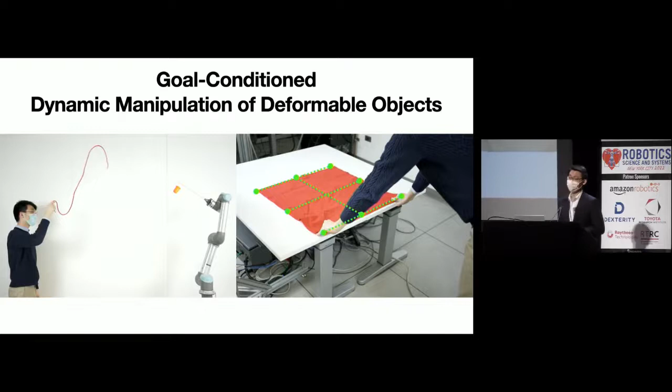We are interested in the task of goal-conditioned dynamic manipulation of deformable objects. For example, hitting a target accurately with an unknown rope, or placing a tablecloth to a precise location. To the best of our knowledge, no existing robotic systems can solve this task.

Why is it so hard? Well, under dynamic actions, we can no longer ignore the object's physics during planning. Yet the physics of deformable objects are notoriously difficult to model. And even if we have a perfect model, we all know how hard it is to tune the simulation parameters for even just one object.

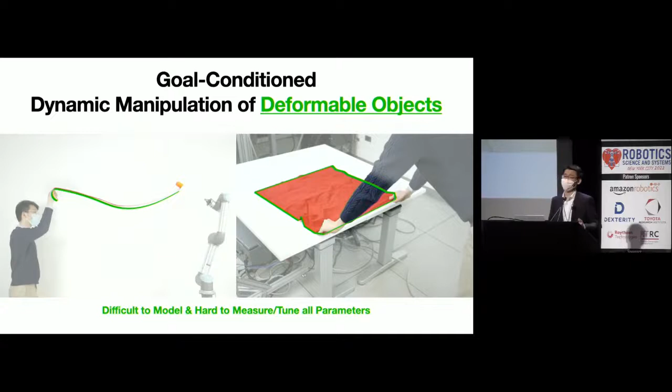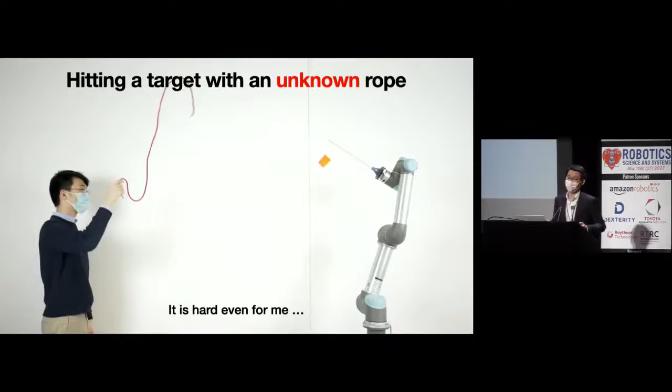And to make things worse, our tasks require high precision to achieve the goal, with a tolerance of a few centimeters. And to be honest, the whipping task in particular was quite hard even for me. Given an unknown rope, it's close to impossible for me to hit the goal on my first attempt. But the good thing is that after each attempt, I can get closer and closer and eventually hit the goal.

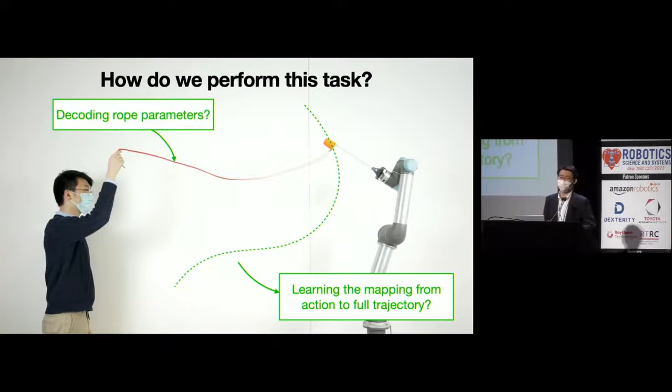So what did I learn during this process? Was I able to learn the mapping from action to a full trajectory? I don't think I can. Was I decoding some key rope parameters, like the length or density? I don't think I can either. Did I bump into the goal via some random exploration? Unlikely, given the size of the action space and the tight tolerance required. However, these are the popular methods that we use today to solve similar problems.

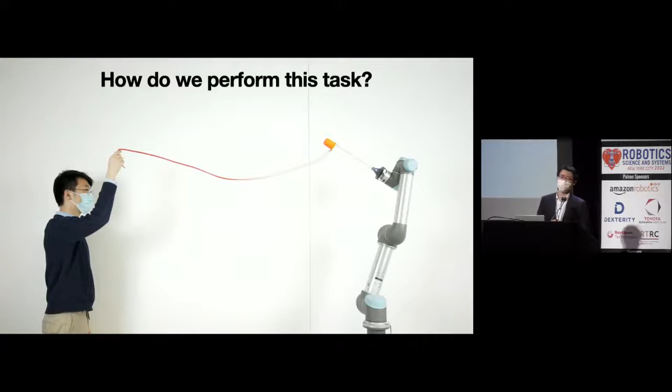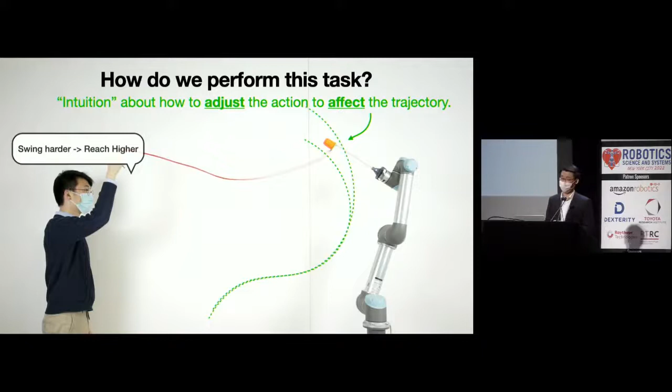So if that's not what we learned, then what is it? I think I have this intuition about how adjusting the action will affect the trajectory. For example, swinging harder will make the rope reach higher, and extending my arm will make the tip go further. It's hard to know how exactly the trajectory will change based on my action, but my guess for which direction to change my action is almost always correct.

And therefore, our hypothesis is the knowledge about this change or adjustment is much easier to learn and generalizable to different objects. And therefore, in this work, we formalize this intuition into an algorithm called Iterative Residual Policy. And here's how it works.

At its core, the algorithm learns a delta dynamics model that takes in the observed trajectory and a delta action as input, and predicts the updated trajectory with the delta action applied. Here, we parameterize the action with two target joint angles and a maximum joint speed. The trajectory is represented as the occupancy grid.

By sampling different delta actions and predicting the corresponding trajectory, our algorithm is able to iteratively select a better action and get closer and closer to the goal. Note that this delta dynamics model is trained entirely in simulation.

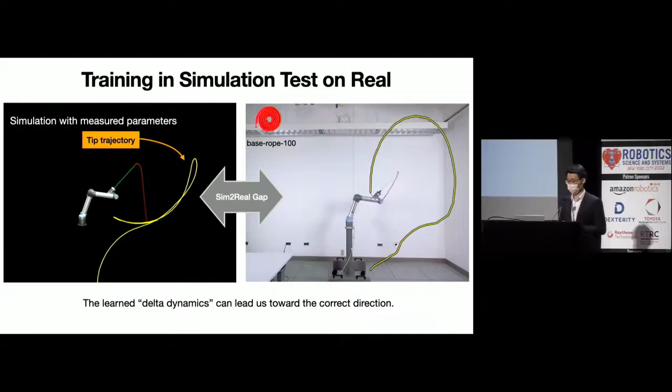And here is the system in action. We track the tip of the rope with a camera and use the trajectory as input. The error is defined by the shortest distance along the trajectory to the goal.

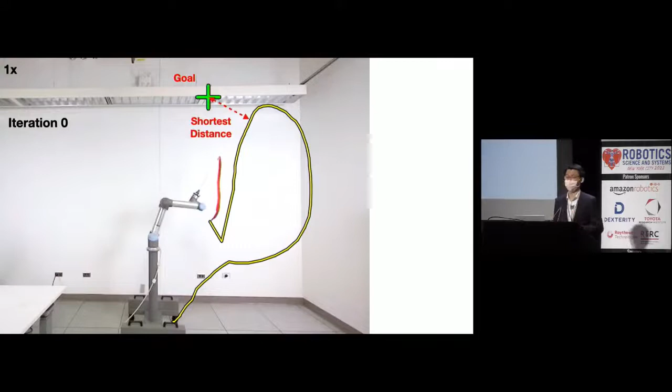And then the algorithm will sample a set of delta actions from a Gaussian distribution, and the width of this Gaussian distribution is scaled proportionally with the error. And then we predict the trajectory for each delta action, and the delta action associated with the smallest error is selected for next step execution. This process will repeat until convergence, and it usually takes less than 10 steps for this task.

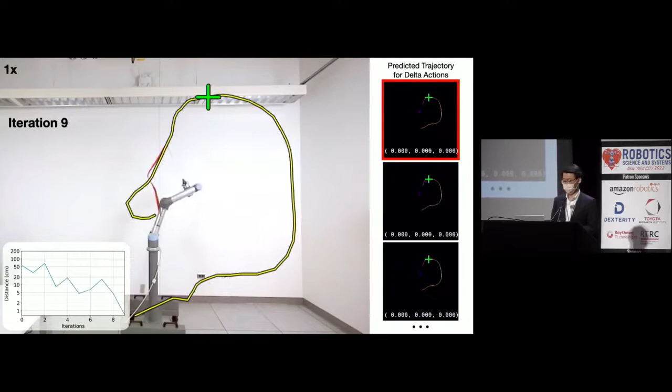All right, that's for one rope. And in the following experiments, we want to systematically test our algorithm's generalization capability against different ropes with significantly different physical parameters. In all following experiments, we use exactly the same model trained in simulation only.

And here, I want to show you how big the difference is between different real-world ropes. What you see here are the tip trajectories of different ropes executed using exactly the same robot action. As you can see, they're very different. The first one on the left is not even a rope, it's a long piece of cloth that has much higher air resistance compared to a rope.

The third one is a bullwhip, which is quite stiff and has non-uniform linear density. The effect of these properties are not captured at all in our training data, which was collected in simulation. Therefore, it really requires a system to adjust using visual feedback to accommodate these different novel rope dynamics.

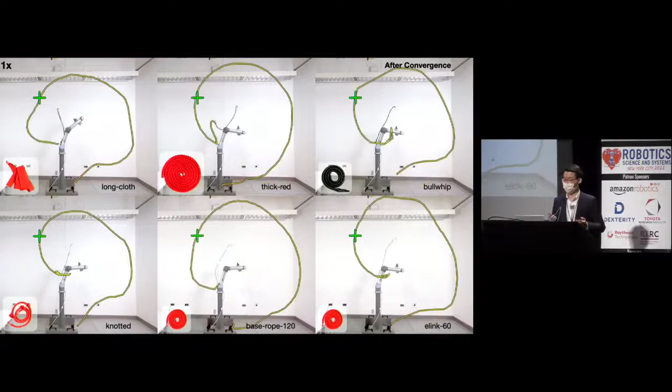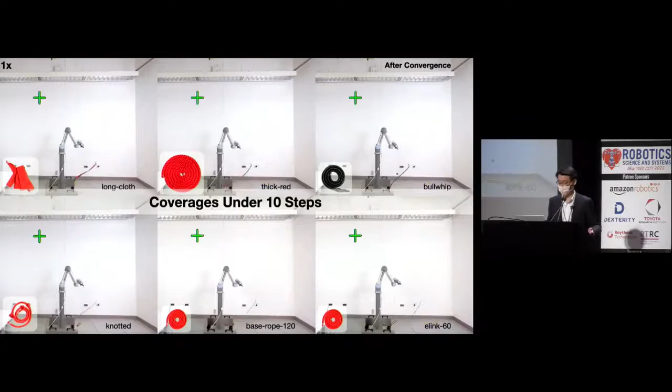Here is the resulting trajectory of the policy after it converges on each goal. As you can see, the policy will choose different actions to reach the same goal to accommodate different rope dynamics. The accuracy here is very close to the limit of our trajectory representation resolution. We also want to highlight our sample efficiency, since all of these results converge in less than 10 steps in real.

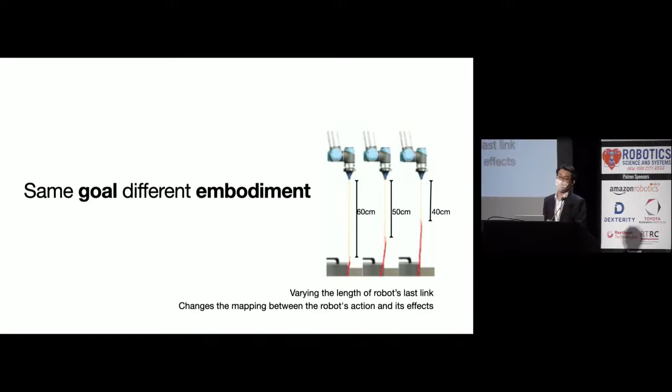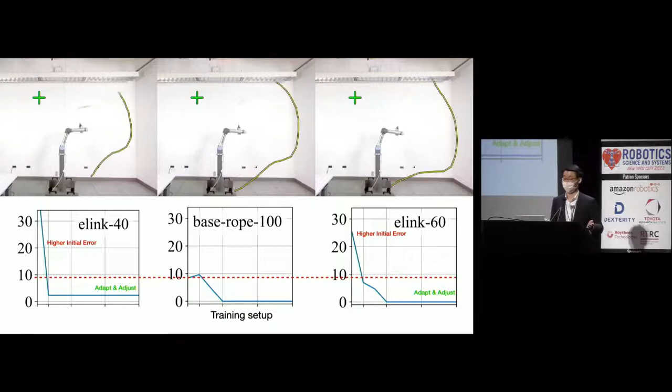Next, we want to show a less common form of generalization, which is against different robot hardware embodiments. We vary the length of the robot's last link, which changes the mapping between action parameters and their effect. Again, exactly the same model trained in simulation is used. As we can expect, robot systems with different hardware embodiments compared to the training setup started out with a much higher error, but regardless, it's able to adjust using visual feedback and get good performance.

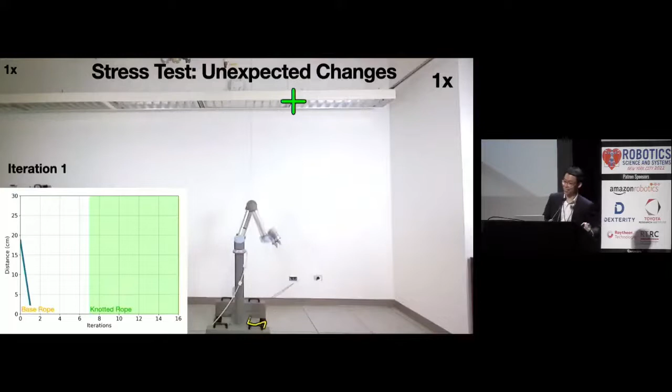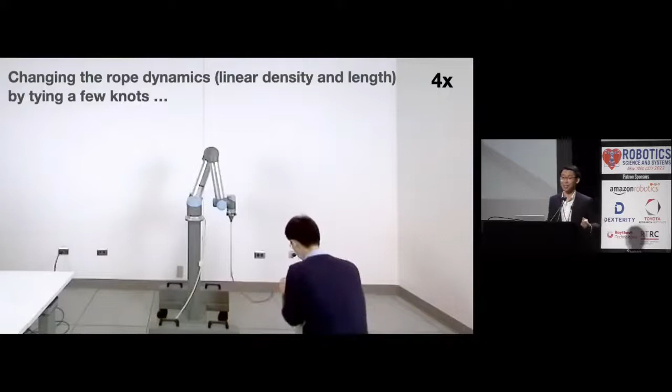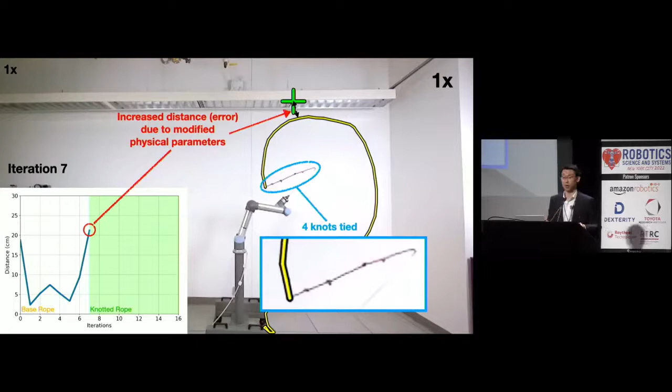Then we want to further stress test our system's robustness against unexpected changes. We first let the system converge on a given rope and goal. Then I come in and tie several knots on the rope, which changes linear density and length. As we can expect, it immediately results in much higher error, but regardless, the system can adjust using visual feedback and quickly regain good performance.

This actually happens to us multiple times organically during our experiment, because sometimes the rope just ties knots on itself. But regardless, the system still works, and then we only see a spike in loss.

Finally, we want to demonstrate the generality of the IRP framework by applying it on a slightly different task, which is cloth placement. The task is to place tablecloths at a precise location given a target pose, where the pose is defined by 9 key point locations on the cloth. Note that some of these target poses are outside the robot's physical reach range. Therefore, dynamic actions are required to solve this problem.

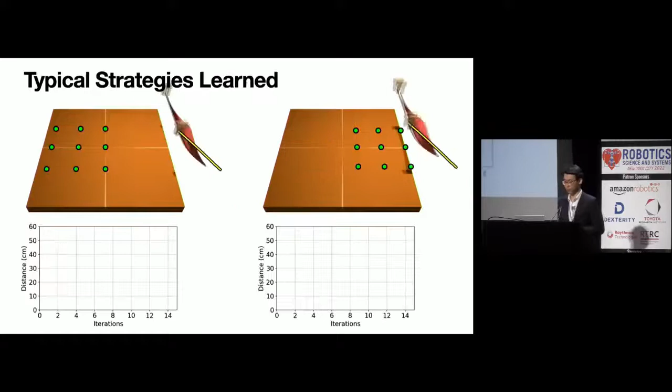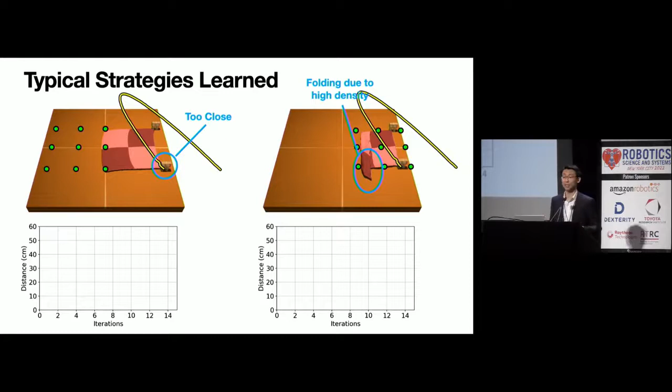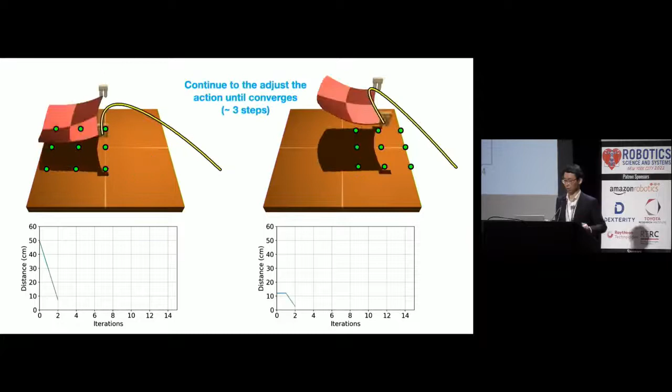Here are 2 typical strategies learned by our algorithm. In the first case, the cloth landed a bit too close compared to the goal. In the second case, the cloth folded by itself due to high density. Based on this observation, the algorithm will increase stroke to swing further in the first case, and decrease speed to prevent folding in the second case. Our algorithm will continue to adjust action until convergence, which usually takes 3 steps for this task.

OK, here's our takeaways. Even though we've only tested on 2 tasks, we believe the formulation of iterative residual policy is quite general and applicable to many tasks with complex dynamics, as long as, number 1, your state is resettable after a failed attempt, and number 2, your observations are trackable. For example, in our case, the goal and the tip location can be tracked as key points throughout the execution.

What we learned from this project is that for some cases, instead of learning the full dynamics model which maps from action to their effect, learning changes in action to changes in their trajectory is much easier to learn and generalizable to different objects, because the direction of this change is invariant against many physical parameters that we have tested.

We also want to say that IRP is a new way to distill relevant knowledge from existing simulators, especially when they're inaccurate. If we think about our existing simulators, a lot of them started out with gaming applications in mind, and therefore they trade accuracy for speed. But still, humans can transfer our real-world skills to these games just fine, which means the simulator must be doing something right. Our goal should be to figure out the right way to use these simulators to unleash their full potential in robotics.

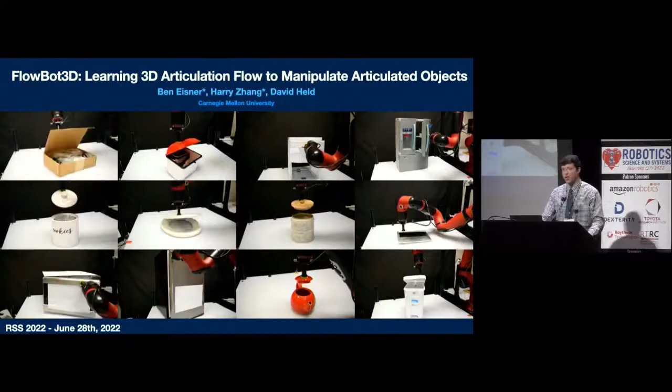Okay, so next up we have Benjamin Eisner presenting Flowbot 3D, learning 3D articulation flow to manipulate articulated objects. Hey everybody, my name is Ben, and I'm presenting some work on manipulating articulated objects conducted by me, Harry Zhang, and David Held at Carnegie Mellon.

Articulated objects are everywhere. We interact with them all the time. We open doors, drawers, laptops, staplers, refrigerators, all these things without even thinking about it. We can estimate how objects can move just by looking at them. Even though you may not have seen these specific objects before, you've likely seen similar objects, and therefore you can imagine how they might move and how you might use them. And in fact, you definitely can.

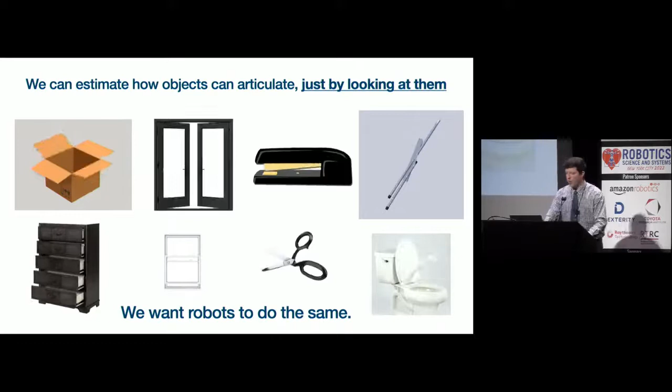We want robots to have the same estimation ability. So how might we construct a robot learning system to successfully manipulate articulated objects just from raw visual observations? Well, one common paradigm in robot learning is to learn a big end-to-end neural network model, which maps directly from raw observations to low-level robot actions. This style of approach can be quite powerful because it can directly optimize for the manipulation task at hand. However, it's often quite hard for these end-to-end models to generalize well outside of their training domain.

Now, at the other end of the spectrum, you can design a modular visual scene understanding pipeline tailored to the task of articulating objects. This might consist of a segmentation model which segments discrete objects in the scene and then further segments out each part of each object. Then you might want to determine which of those parts are connected to each other and build a kinematic tree connecting all the parts found in each object. For each articulation you find, you might want to estimate the exact screw parameters which govern the articulation. Once you've parsed this whole representation, you can pass it to a motion planner, which can grab the part you want to move and use the estimated structure of the object to devise a good path to articulate the part. When designed correctly, such modular approaches can generalize quite well, better than end-to-end approaches, particularly when it's difficult to collect many real-world trials.

Now, there are points of failure in the system, and there are many of them. Each of these estimation submodules is kind of an open area of research in itself, and an error in any one module can derail the execution of the system. So this can be quite brittle. We'd like an approach that gets the best of both worlds, allowing us to impose some domain knowledge into the system while having fewer points of failure.

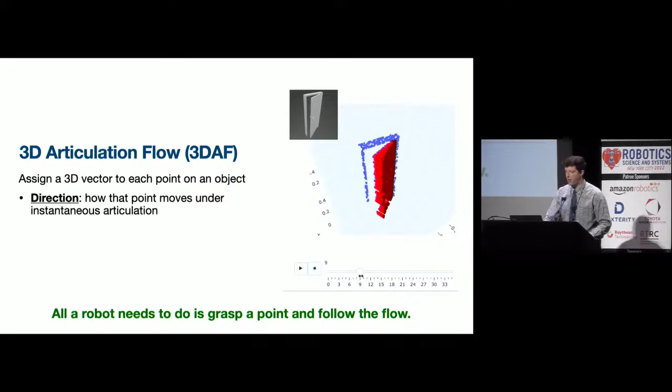We assign a 3D vector to every point on the object. The direction of this vector describes how that point can move under instantaneous articulation, and therefore which direction of optimal force is at that point. The magnitude of the vector describes the relative leverage at that point.

So all you need to do is look at this diagram here. You see these red vectors, which are the 3D articulation flow. The longer vectors occur further from the door hinge, and they all point in the direction that the door will move as it swings out. So given this representation, all the robot needs to do is grasp a high leverage point on the object and articulate the object in the direction that that flow points.

Okay, so how do we go about predicting 3D articulation flow? We take a point cloud observation, run it through a standard PointNet++ backbone, and output our estimate of 3D articulation flow. Specifically, for each point in the input we predict a flow vector, delta x, y, z, which indicates the amount that point would move if a small articulation were applied in the opening direction.

We can compare this predicted articulation flow directly to some ground truth articulation flow, computed from the known kinematic structure of the training objects in our dataset. We supervise this articulation flow with the mean squared error loss between the predictions and the ground truth.

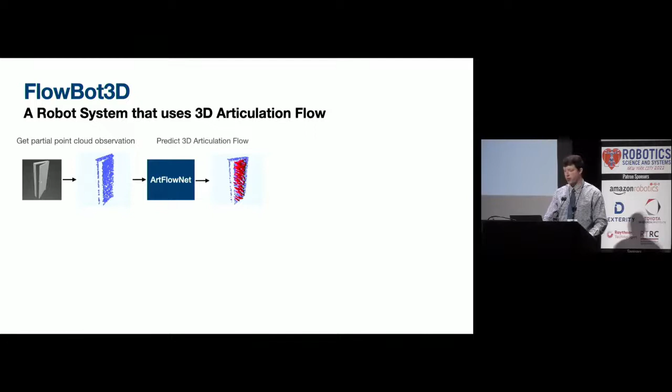Now we'll describe how we can use this 3D articulation flow in a real robot system, which we call Flowbot3D. First, we use a depth camera or LiDAR to get a partial point cloud observation of the object, then we use our 3D articulation flow estimation module to densely predict the 3D articulation flow at every point in the input. Then we execute a two-phase policy.

First, we select a contact point on the object, which amounts to choosing the point with the highest leverage subject to the constraint that the point is graspable. For a suction gripper, we only choose points with low estimated surface curvature, a simple heuristic that works pretty well. We then use a motion planner to send the robot to that grasp location and execute the grasp.

Once the robot has grasped the object, we can directly take the 3D articulation flow predicted at that contact point and set that as the desired direction to move the gripper. Then we use motion planning to move the gripper in that direction a small amount. Finally, we close the loop by taking another point cloud, getting the articulation flow, executing a small motion, and repeating until the object has been fully articulated.

So the only learned part of this system is that articulation flow estimation module. To train this, we select objects from the PartNet Mobility dataset and train a single model across examples from 11 different training categories. We use a simulator to get the ground truth articulation flow from these categories.

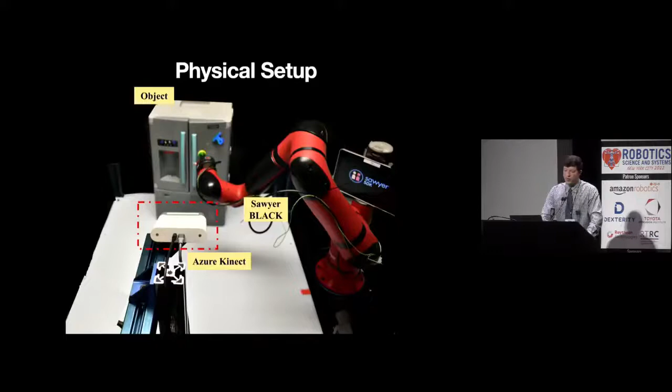We can then test on 10 unseen categories of objects, as well as a real-world collection of articulated objects that we've found in the real world. For our real-world physical setup, we use a robot arm with a suction gripper and the object in a workspace, with a fixed depth camera pointed at the scene.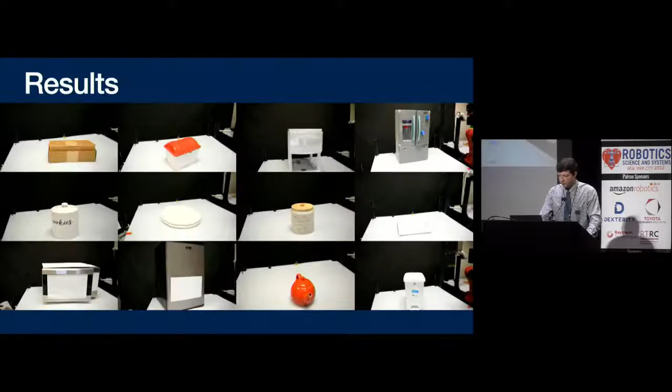Now we'll talk a little bit about how the system performs on both real and simulated tasks. You can see some example success cases here.

So, in essence, our system generalizes to both unseen objects and to real-world objects.

To give you a sense of what predicted articulation flow looks like, here are some examples. In both cases, the network learns to predict very consistent flow, and it predicts flow only on the parts of the object which can move. On the test object, when the points on the moving part become a little occluded, the prediction quality degrades a little bit, but the majority of frames and views give a reasonably accurate estimate.

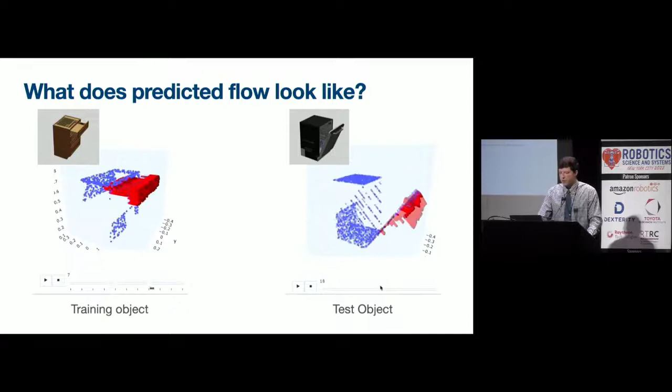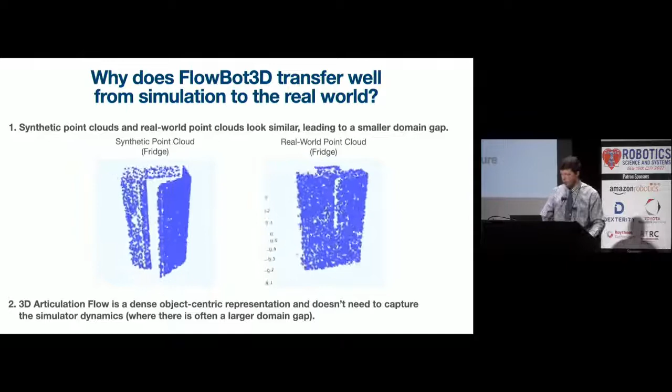So why does this system transfer well to the real world with a minimal drop in performance? We think that this is because of two reasons. First, the input data is a point cloud, which looks relatively similar between simulation and the real world. Second, we're really learning a dense object-centric representation, which is a function of the kinematic properties of the object, instead of learning dynamics or any other kind of property, which is notoriously difficult to transfer from sim to real.

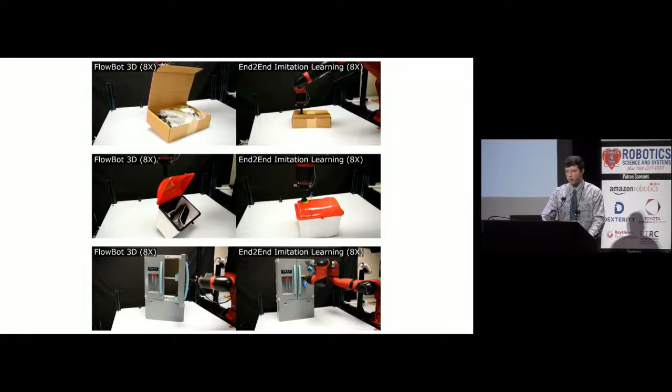All right, let's take a look at some real-world results. We compare our method with an end-to-end policy in the real world. As we can see, Flowbot 3D is able to repeatedly choose a good direction in which to open each object, while the end-to-end method is not consistently able to do so. Now, these jars aren't technically articulated, but we treat jar lids as if they were prismatic joints. This follows the convention from the Sapien dataset.

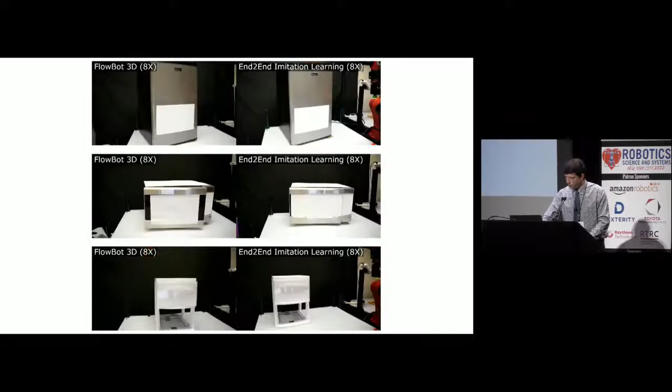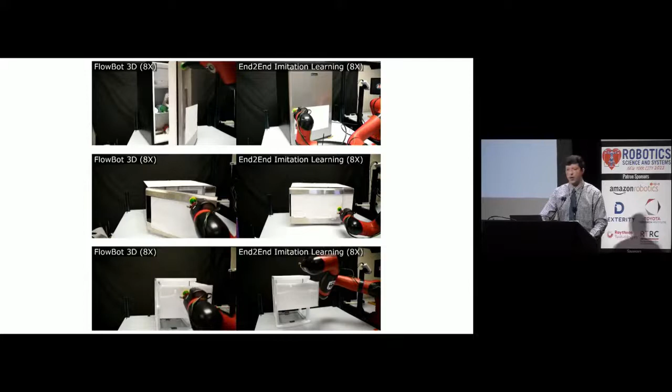Now, when the objects are very heavy or fixed to the table, Flowbot 3D still succeeds with a small amount of compliance in the gripper and controller, making the policy robust to small prediction errors. And here's my favorite example, which is lifting a toilet seat.

All right, to recap: Flowbot 3D estimates 3D articulation flow and uses motion planning to articulate novel objects. It significantly outperforms end-to-end policies while avoiding the brittleness of modular approaches. And best of all, we generalize to unseen objects and transfer to the real world without retraining.

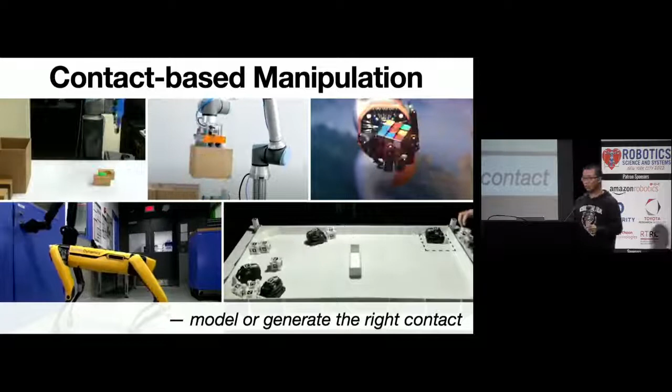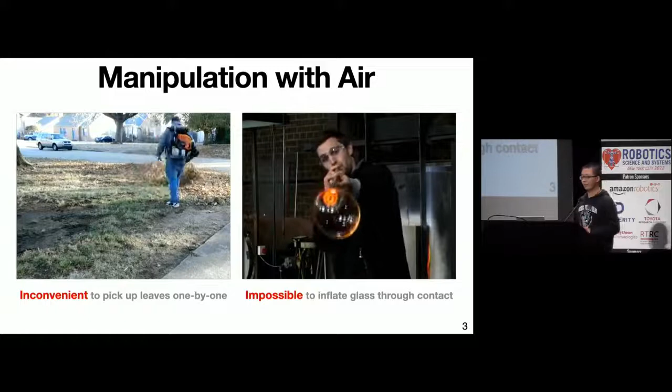When we talk about robot manipulation, it's often all about contact, such as how to model or generate the right contact in order to interact with an object. However, many common objects in our daily life are either inconvenient or even impossible to manipulate with contact. For example, it's inconvenient to pick up leaves one by one, and it's impossible to inflate glass with our hands. But they can be effectively manipulated using air.

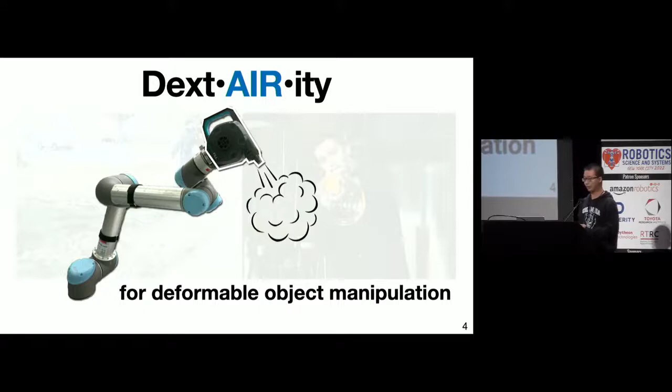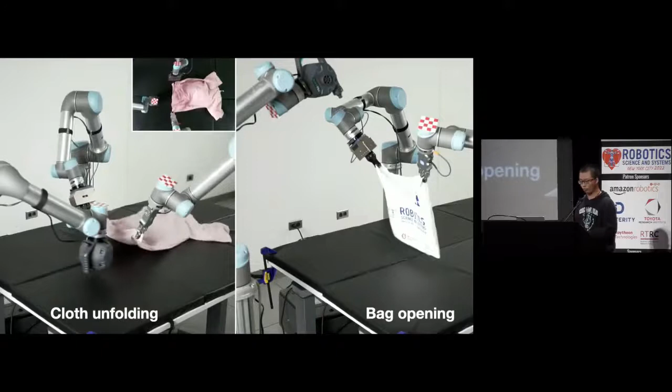So in this work, we want to enable robotic dexterity with air. So we call it DextAIRity, with an A-I-R inside the name. We study it in the context of deformable object manipulation, such as unfolding a crumpled cloth or opening a deformable bag. Both of them are very challenging for contact-based manipulation, but they can be nicely solved with DextAIRity.

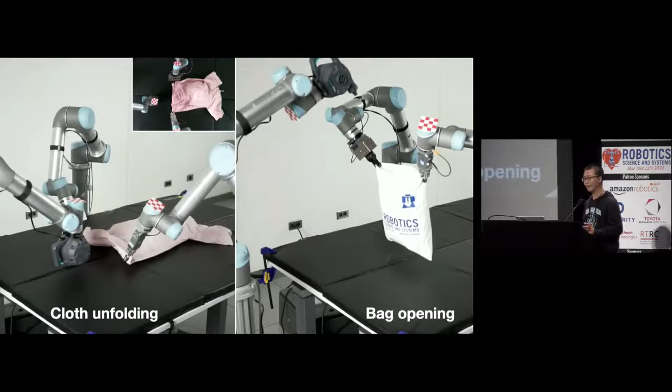So why do we want to use air for manipulation? Here are a few advantages. First, air enables the robot to apply a dense force field. For example, we can extinguish all these candles with only one blow. In contrast, contact-based manipulation can only apply force through sparse contact, which is often not efficient for underactuated objects like cloth.

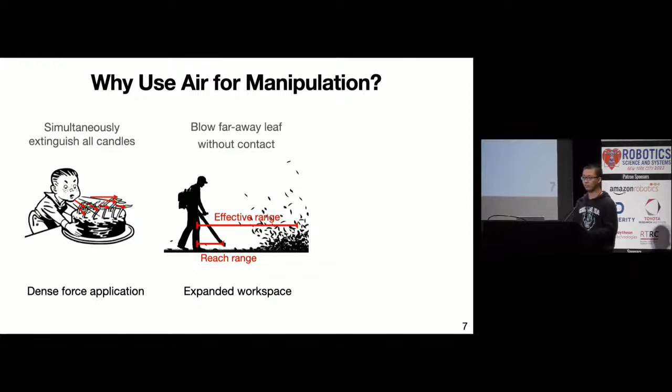Second, air-based manipulation allows the system to reach objects beyond its kinematic reach range, such as leaf blowing in distance. And finally, since air is much safer to move at high speed, it can operate safely around people.

To enable these advantages, here is our system design of DextAIRity. It consists of 3 UR5 arms: 2 with parallel jaw grippers, and 1 with an air pump. Since we do not require high-speed movements, these robots could also be replaced with other slower and cheaper types.

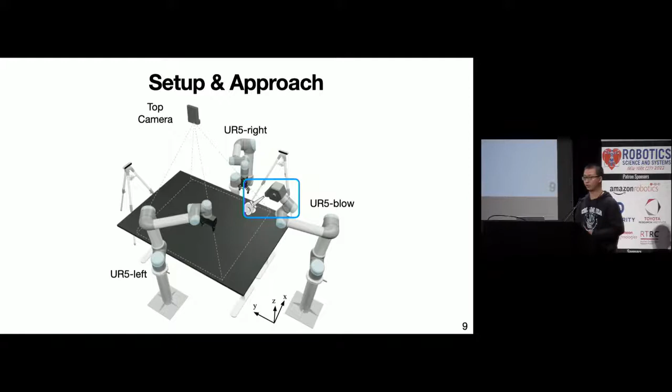Visual observations are captured from a top-down camera. Here we can see none of these robots could cover the entire workspace, or even the surface of a fully unfolded cloth. Therefore, long-range interactions by airflow is a natural fit for this challenging task.

We take a learning-based approach to this problem. First, the system infers where to grasp on the cloth. 2 robot arms then lift and stretch it in the middle of the workspace. And then the third arm executes the blowing action.

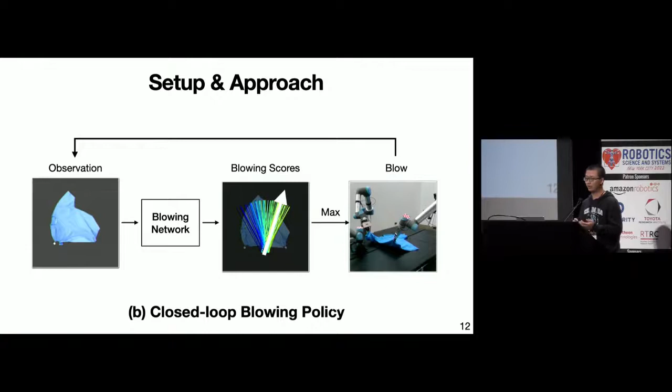Now let's take a close look at this policy. The network infers a score for each action candidate, indicating the cloth coverage prediction. The action with the maximum score will be selected for execution. The observation is then input to the policy to infer the next action. With this closed-loop policy, the action could be adjusted in time according to visual feedback.

The policy is trained with NVIDIA Flex simulator, where the airflow is simulated as a stream of invisible particles.

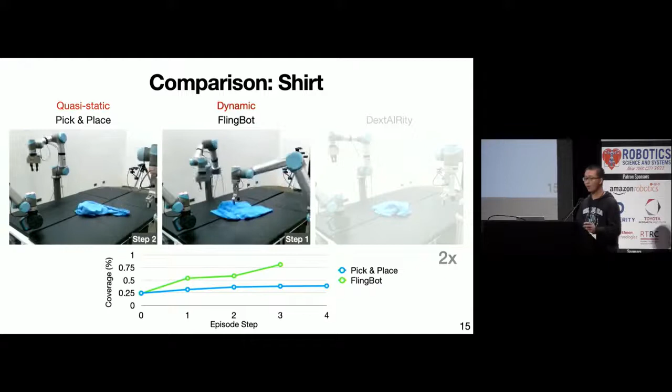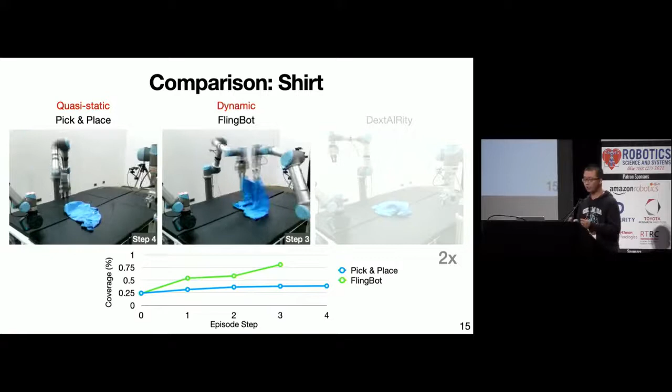Here, we compare with 2 popular methods for cloth unfolding. Quasi-static action, like pick and place, is not efficient and requires many interactions to achieve the goal. Dynamic actions, like fling, is able to efficiently unfold the cloth when it is relatively small, such as this shirt.

Then, how about our DextAIRity? Here, we can see DextAIRity is able to unfold this shirt with only 2 interactions. And there is no need for high-speed robot movements.

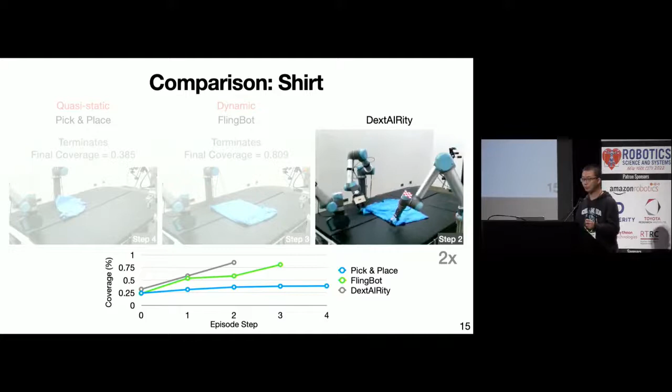Here's a larger cloth which can no longer be handled by FlingBot. Even with the maximum fling speed, the cloth can only be unfolded in half. Therefore, better robots with higher speed are required, which is very expensive and dangerous around people.

Will DextAIRity face the same issue? The answer is no. With the help of active airflow, DextAIRity has no trouble unfolding this super large cloth.

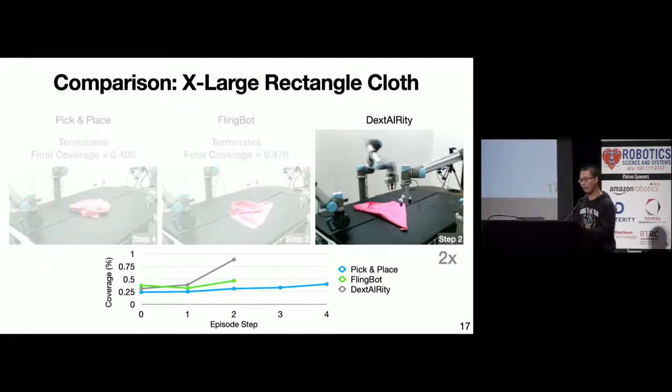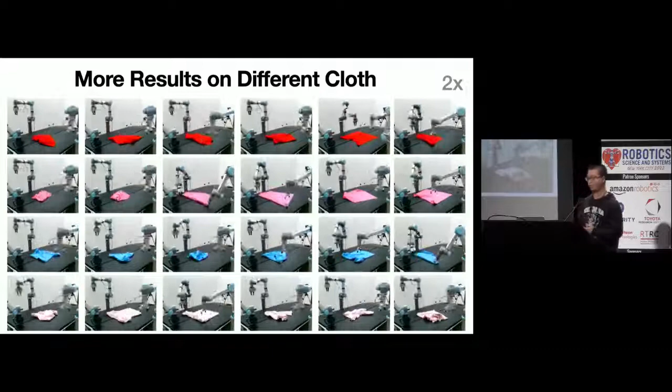Here are more results in real world. We found our approach shows strong generalization ability. While the policy was only trained with rectangular cloths in simulation, it can generalize well to different shaped garments, such as shirts and dresses, from different crumpled states in real world.

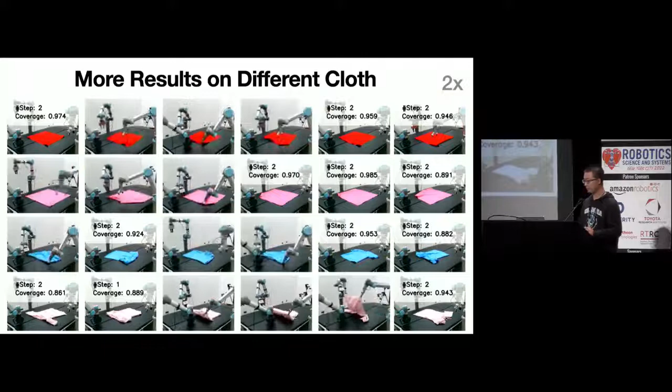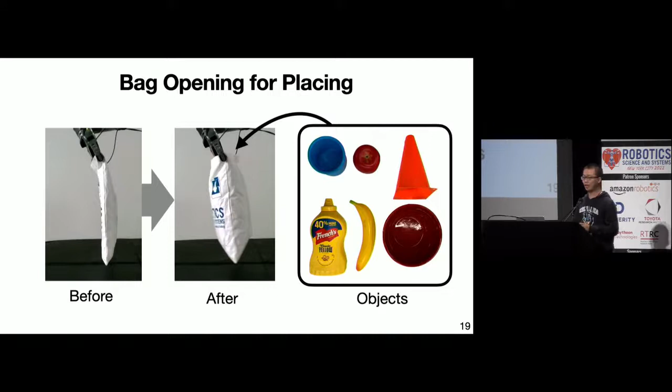DextAIRity can also be applied to other tasks, such as bag opening. Here, the goal is to open a deformable bag and maintain its open state so that we can put other objects into the bag.

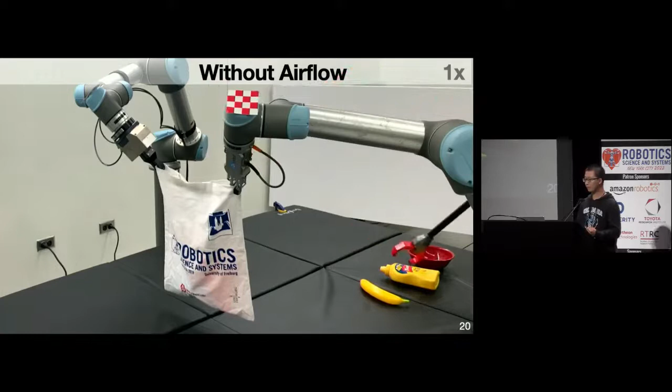Without airflow, the bag opening is often too small, making it really hard to put objects into the bag. But when the bag is opened by air, the placing task is much simpler. Here we can see we can even use inaccurate tossing actions to put objects into it.

Here is our system setup for the bag opening task. We assume the bag has already been grasped by 2 robot arms. And the third arm with an air pump executes the blowing action.

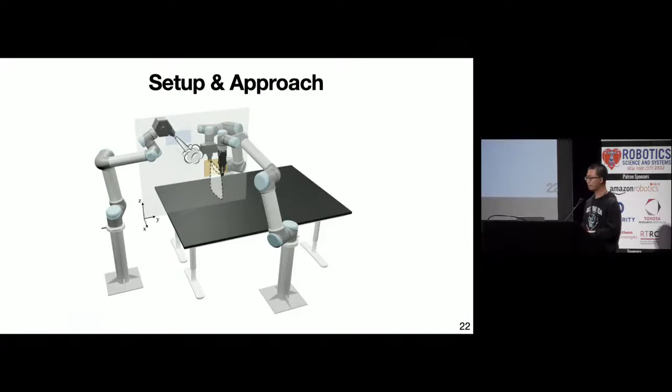The policy infers a score for each angle, selects the best one for execution, and adjusts continuously according to visual feedback.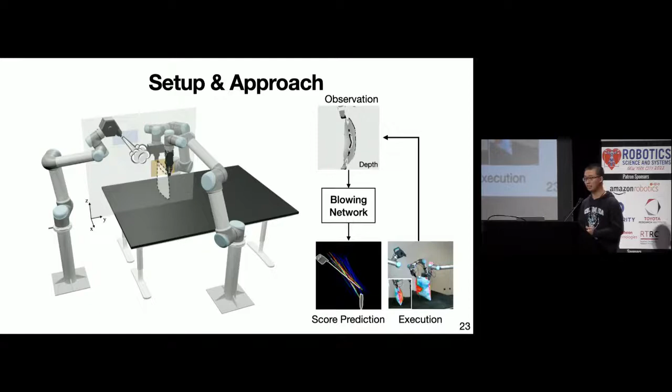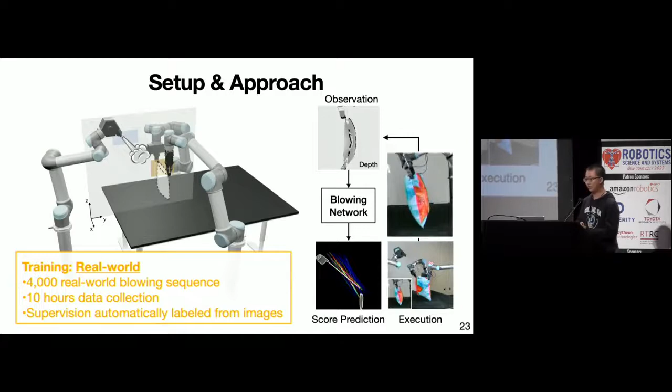Flex is not able to simulate accurate air dynamics, such as the Bernoulli effect, which is very important to this task. So our policy is trained on real-world data, and the supervision is whether the bag is open or not, which can be automatically labeled from a side view image.

We found this task is very challenging for contact-based manipulation. If we only have 2 contact points, there is not much we can do. Even with dynamic actions, like shaking, we cannot open the bag.

However, from this video, we can see using air makes this task much easier. Here, we also compare with a heuristic-based policy to show the closed-loop adjustment is necessary.

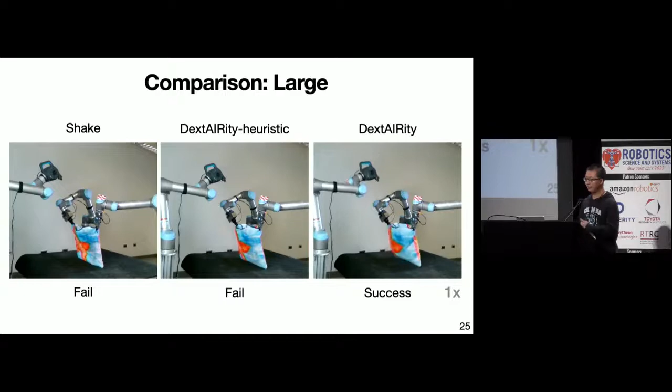Here is another example with a large plastic bag. In this case, DextAIRity opens the bag with only 1 trial.

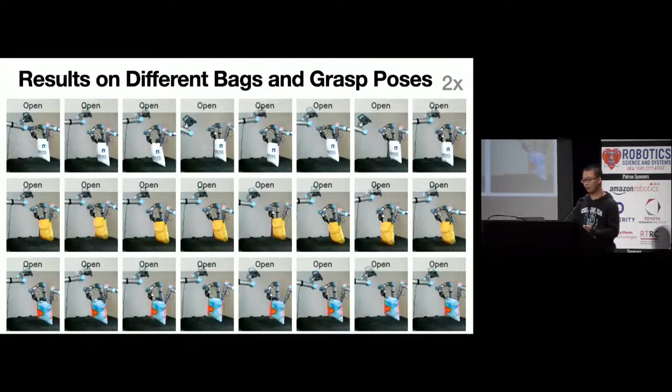In our experiment, we found the policy trained using only 1 bag is able to generalize well to different bags and random grasp poses. We also observed that our policy learned some interesting strategies. For example, it tends to aim slightly above the bag opening to leverage the Bernoulli effect.

To summarize, in this work, we show that air can be used to simplify many complex manipulation tasks, since it allows the robot to apply a dense force field, expand its reach range, and provide safe, high-speed interactions. With this work, we hope to inspire more innovative ways to incorporate air in robot manipulation.

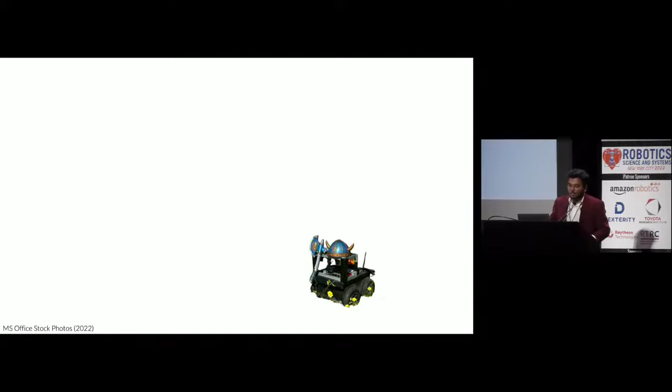Let's say you have a small mobile robot tasked with doing last-mile deliveries in a neighborhood like the Columbia campus. Given some high-level information about the goal, such as this picture of Meadmore's sculpture right outside the engineering building and its address, the robot must navigate a challenging environment in search of the goal. Without prior access to the environment, the robot must make informed decisions to maximally explore it using the goal information.

Current learning-based methods for goal reaching in novel environments fall under one of two camps. The first camp relies largely on training from simulated data, often on the order of one billion frames. Such methods have shown great promise in solving long-horizon navigation problems by utilizing multimodal information such as floor plans, but they often require access to a simulation replica of the deployment environment, which can be prohibitively expensive, if not impossible, for complex open-world environments. The second camp alleviates some of these challenges by learning directly from data collected in the real world. These systems can learn from small amounts of offline data and generalize to visually similar environments. However, these methods have not been shown to use multimodal information to guide exploration in novel environments, and hence tend to be impractical to deploy in large-scale settings.

To extend the capabilities of these systems to city-scale environments, let's take a page from the book of the best embodied navigation agents we know of. When humans navigate new environments, such as when hiking outdoors, we make use of both geographic knowledge obtained from trail maps and learned patterns from past experience.

However, in contrast to geometric approaches of using a map like SLAM, humans don't require the maps to be accurate or metric. A person can navigate a hiking trail or a college campus just fine using a road map on their phone that roughly indicates the streets and houses. In fact, that's exactly how a lot of you got to the conference today - the RSS organizers shared directions in the form of a Google Maps view, just yesterday. Safe to say that people are pretty good at using such maps to find their way around new environments. Can we get a robot to do the same?

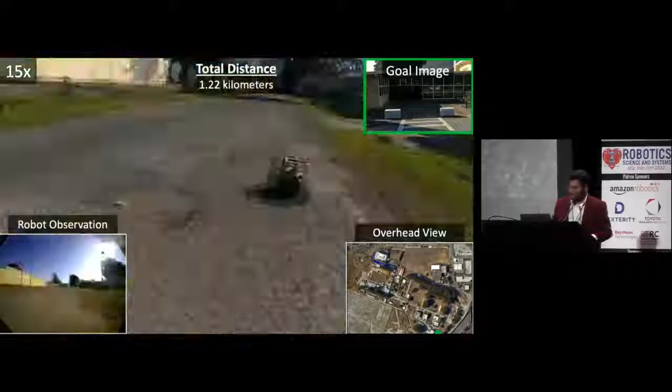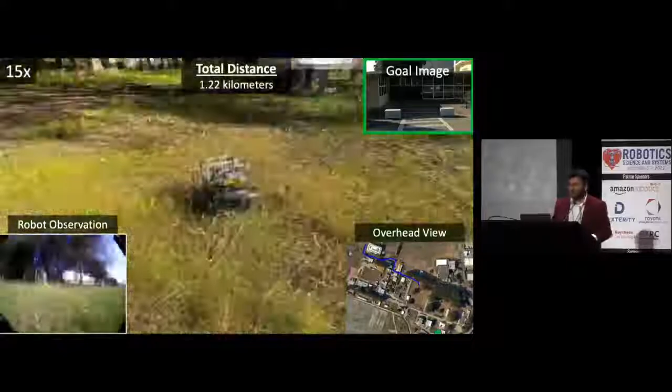When deployed in a new environment, like this example, we have a goal specified by an image at the top right and GPS at the bottom right, using the satellite image as hints. The robot uses its egocentric observations and navigates through complex environments, including following roads, cutting across grass, often going through trees when the satellite hints are actually not valid anymore under the canopy, and eventually reaching the goal.

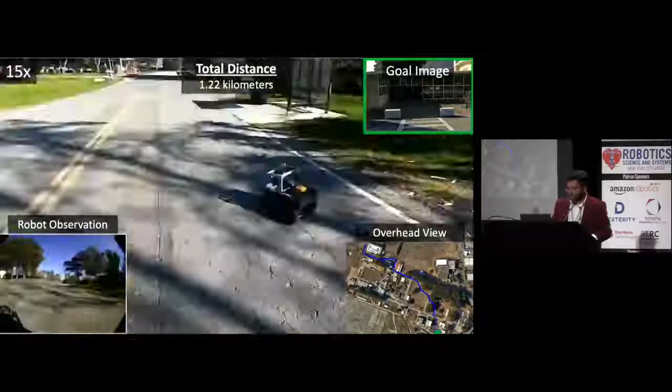In one instance, the robot drives into a cul-de-sac, and uses its graph to backtrack around and then find the goal. This trajectory is about 1.22 kilometers with me running behind the robot. It looks janky because it's about 20 minutes long, and I sped it up for the talk.

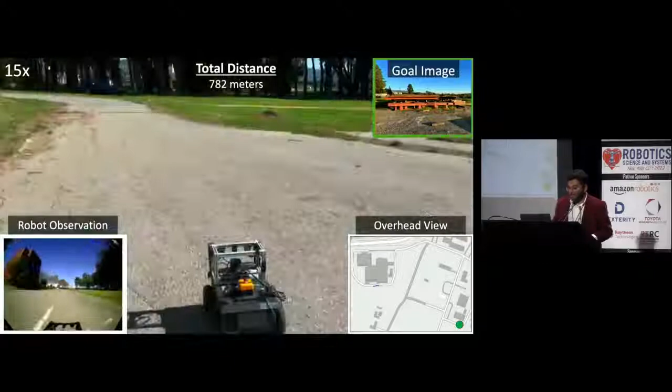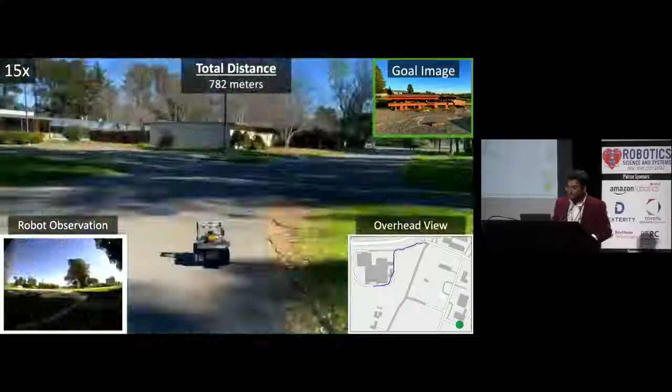In this experiment, using a schematic roadmap instead of a satellite image, as you can see on the bottom right, we see similar behavior where the robot is able to use the learned heuristic to drive towards the goal. Interestingly, using a schematic roadmap instead of a satellite image encourages the robot to navigate on marked roads instead of cutting across grassy fields like we saw in the last experiment. This emergent preference of following roads is consistently observed across multiple environments.

This is another example with the same starting goal location where only the hints differ. ViKiNG can extract better correlations from feature-rich satellite images, while the roadmap induces just following paved roads.

I have a lot more videos of our experiments, ablations, and quantitative analysis on the project page that I'd like to show, but in the interest of time, I'm going to wrap my talk here.

Our key insight is that effectively leveraging a small amount of geographic knowledge in the form of hints can provide strong regularities that enable robots to navigate to distant goals. We find that incorporating these hints as goal-directed heuristics for planning enables emergent preferences such as following roads or staying on trails in parks, which are induced by the nature of these hints. Additionally, ViKiNG only uses them for biasing the high-level search, in contrast to geometric methods that use these hints more religiously. The algorithm is robust to imperfect hints in the map.

Lastly, while we've only demonstrated the system for satellite images and schematic roadmaps, the contrastive objective and the framework we described is fairly general and can be adapted to support more interesting modalities, such as hand-drawn paper maps or even textual instructions, which would be a lot more user-friendly. In fact, this is something we've been exploring in our recent research on enabling embodied instruction following agents.

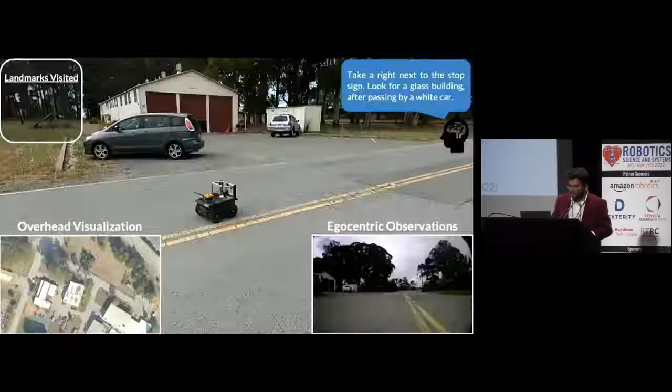Thanks for your time. I'll just leave some videos playing in the background while we take questions.

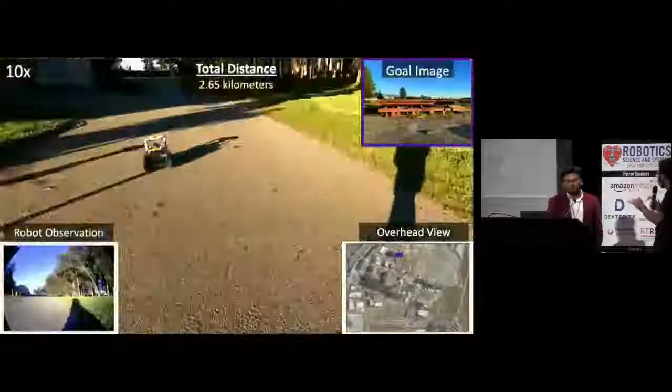So when you try to compare to a baseline for this kind of work, I know you can't directly compare to A-star planning, without images. How do you actually formulate a reasonable baseline to compare to?

I think one very nice way to set up some baselines is to try ablating the different components we discussed. So you can try ablating just the physical search part of it, which is something we do in the paper, and you can have A-star, but then the other parts are your learned parts. Something else you can do is remove the hints and look at the rest of the things just to see how important different parts of the system are. That is something we have extensively in the paper, and maybe I can share more in the poster as well.